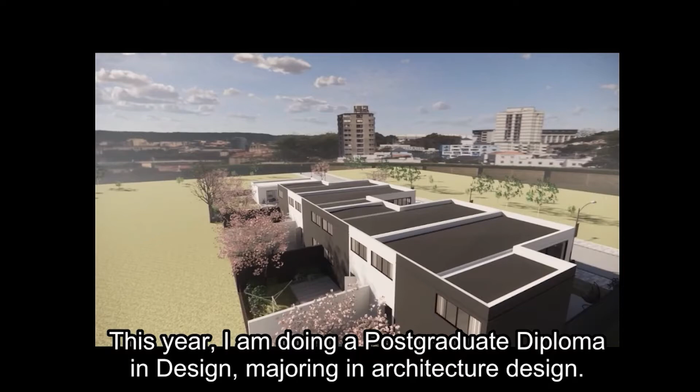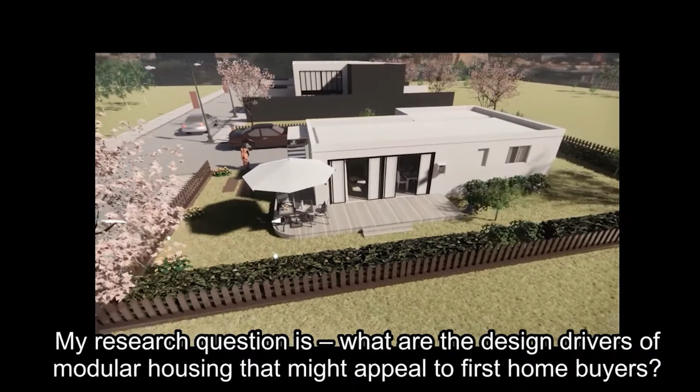This year, I'm doing a postgraduate diploma in design, majoring in architectural design. My research question is, what are the design drivers of modular housing that might appeal to first-home buyers?

The current urbanization and financial speculation have caused an unsustainable global housing crisis. In New Zealand, the most obvious feature of the housing crisis is the soaring housing prices. There are many factors related to the housing crisis, like affordability, demand, and supply.

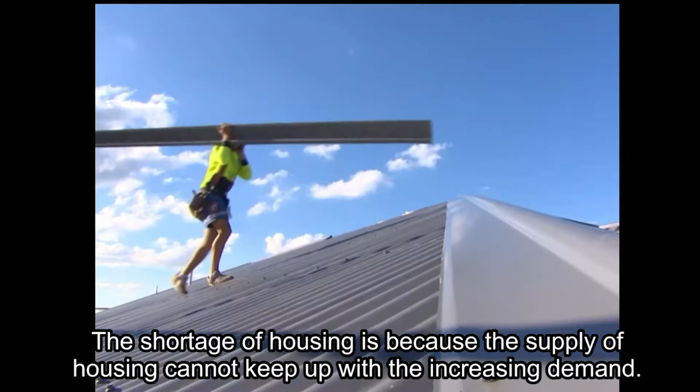However, in the final analysis, a shortage of housing is the fundamental problem. The shortage of housing is because the supply cannot keep up with the increasing demand. As a result, housing prices have repeatedly hit record levels. Thus, it is difficult for first-home buyers to enter the market.

If it is possible to solve the shortage problem, the housing crisis will be solved. Therefore, the possible way to solve the shortage problem is to increase the supply of housing and decrease the demand by investors. The challenge is that traditional construction methods are not able to achieve these goals.

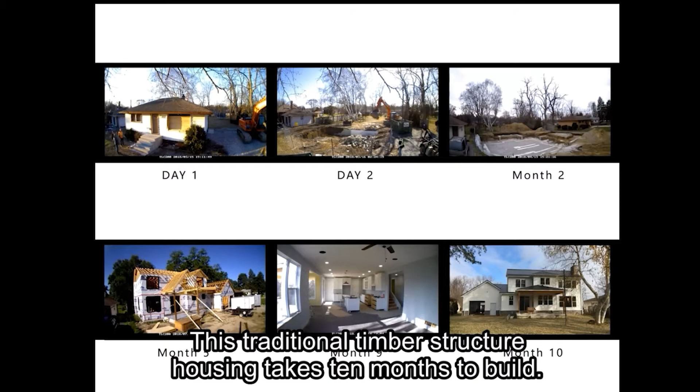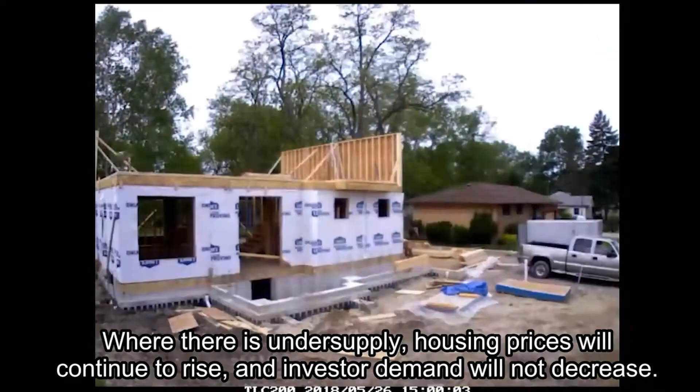Why? This traditional timber structure housing takes 10 months to build. The construction speed is too slow to guarantee the supply. Where there is undersupply, housing prices will continue to rise, and investors' demand will not decrease.

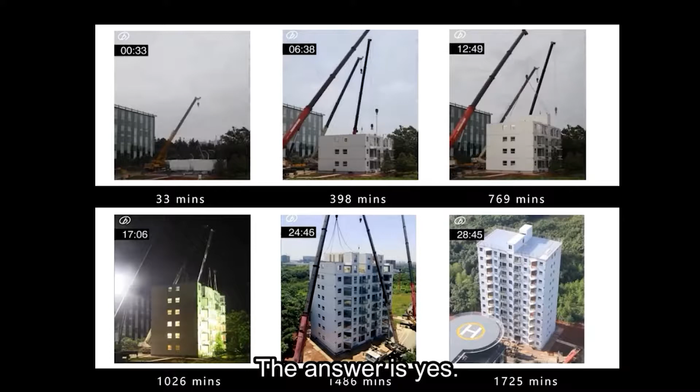Is there any way to solve this problem? The answer is yes. This 10-story modular apartment building in China took only 28 hours to install on site. With this rapid construction speed, the housing shortage can be solved, and the cost is even lower than traditional construction.

Why does modular construction have such a big advantage? Are there any shortcomings of modular construction? To answer these questions, we should understand what modular construction is.

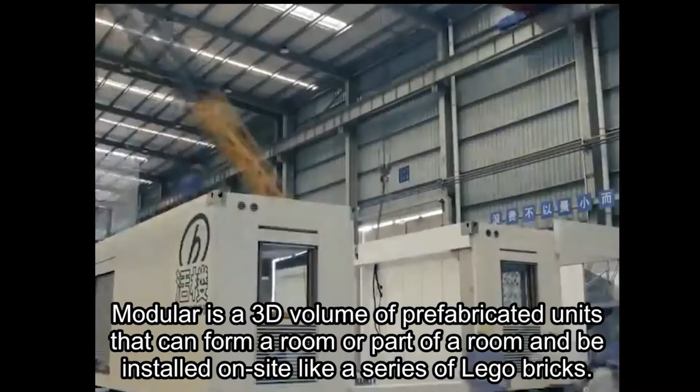Modular is a 3D volume of prefabricated units that can form a room or part of a room and be installed on site like a series of Lego bricks. A modular building can be built rapidly and costs less than traditional building because of mass production.

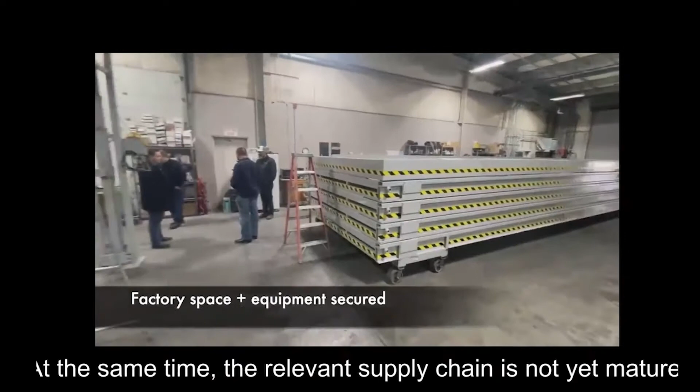As for the shortcomings of modular construction, first of all, the establishment of a large-scale factory for automated production requires many upfront costs. At the same time, the relevant supply chain is not yet mature. Therefore, it is not easy for modular construction methods to replace traditional building methods in the short term.

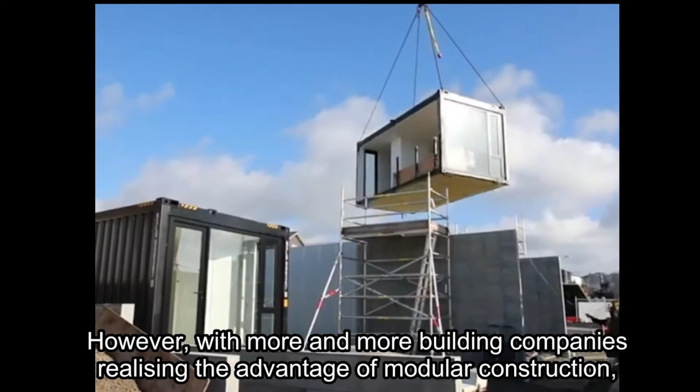However, with more and more building companies realizing the advantages of modular construction, we will finally see the necessary changes in building around us. I believe this is true because sustainability is very important.

We have just talked about the shortage of housing. Have you ever thought about the shortage of Earth's resources? What would happen if human beings exhausted these resources?

Scientists and entrepreneurs have given us two different answers, and it's not science fiction. Which one would be your choice? SpaceX, explore the infinite outer space, or Meta, live another life in a virtual universe?

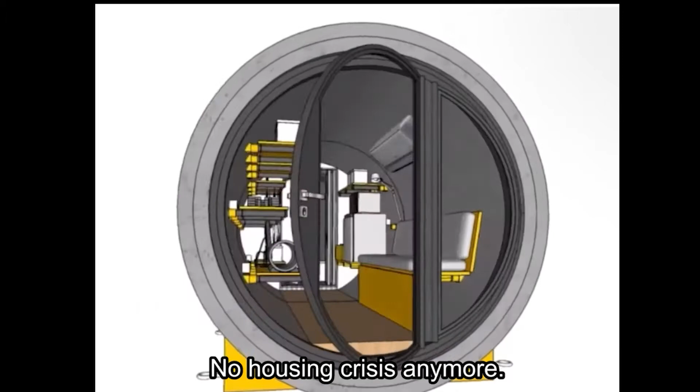If people can learn, work, shop, socialize, and entertain in a virtual universe, do we still need much space in reality? Maybe what we need is this kind of capsule room, no housing crisis anymore.

If we do not want this to happen in the future, we know what we need to focus on now. Yes, sustainability. Modular building is sustainable.

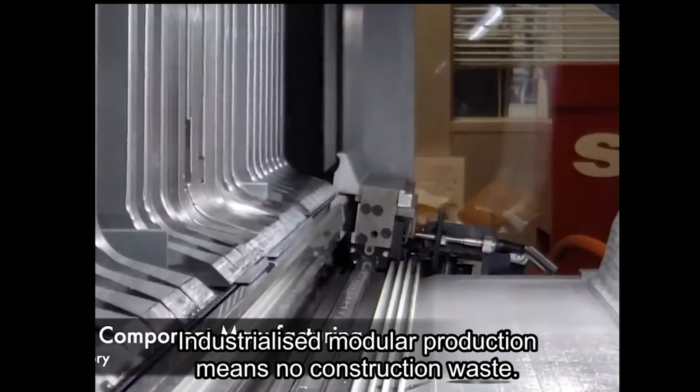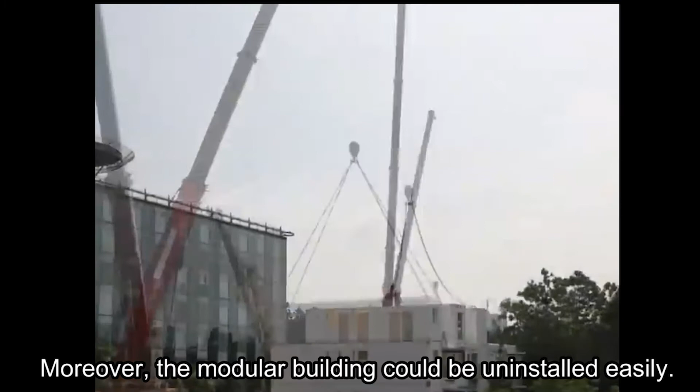Industrialized modular production means no construction waste. Moreover, the modular building could be uninstalled easily. The whole building can be moved to another place, shipped back to the factory for maintenance, and the module can be reused.

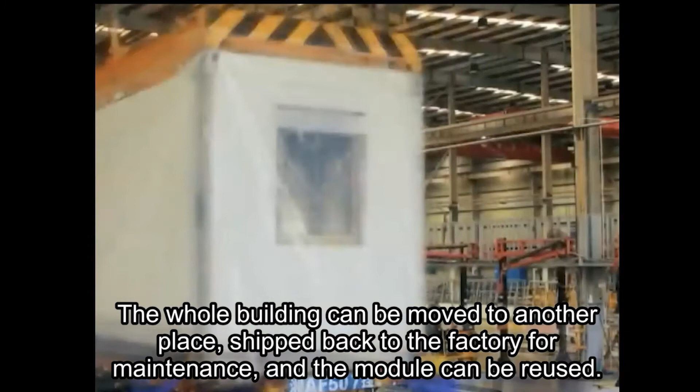Modular housing has so many advantages. Is there any successful case in New Zealand?

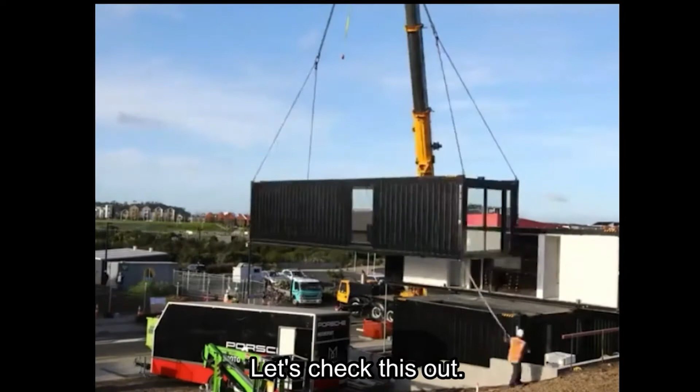Let's check this out. The first case is Modular, a developer in Auckland. The goal of this company is to supply the market with 3-bedroom houses for first home buyers priced at or below $800,000. After a 3-year exploration of the business model, they find that standardized modular housing is the only way to achieve that goal.

This is their product in Hobsonville Point. The second case is Kiwi Modular Homes, a building company in Christchurch.

They used smaller modules with a length of 4.2 meters and a width of 1.2 meters and 2.4 meters. Through the combination of different modules, they can meet different needs, which is more flexible than the module product.

The third case is a modular house on Bassett Road in Auckland. The site of this house was unused for a long time because of the slope, and it was not easy to build with the traditional construction method. There are many difficult sites in New Zealand, and modular buildings can solve the problem of construction on such sites.

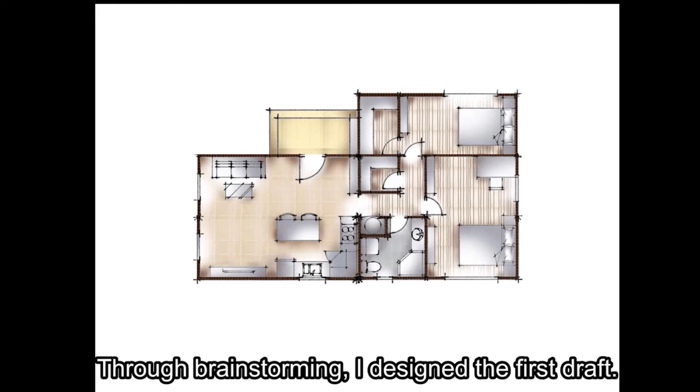I found 3 design drivers of modular buildings through these 3 cases: standardization, flexibility, and suitability for difficult sites. Through brainstorming, I designed the first draft.

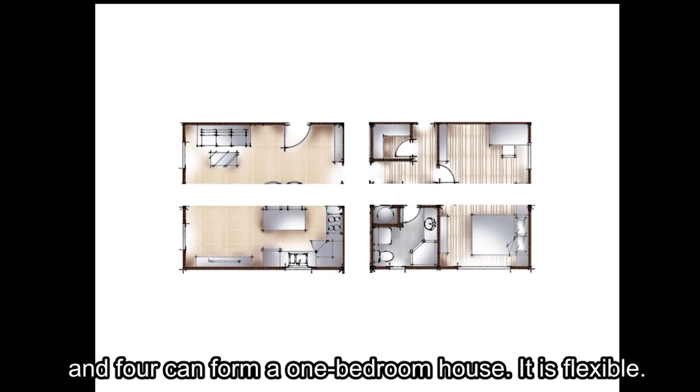This house comprises 5 standardized modules with a standard freight container size, easily transported and installed on site. Moreover, 2 modules can form a small apartment unit, and 4 can form a 1-bedroom house. It is flexible. Then I did a tape floor plan test.

I used tape to draw the floor plan 1-to-1 on the ground. Then I invited students passing by to test whether the layout was reasonable and asked them to fill out a questionnaire. I received 51 feedbacks.

Let's take a look at the participants' demographic first. Most of them are under 30 and hope to buy their first house within 10 years. They hope to have 2 to 3 bedrooms, and the price is between $400,000 and

$600,000. Finally, 65% of participants indicated that they could consider the design of the flexibility of the modular design.

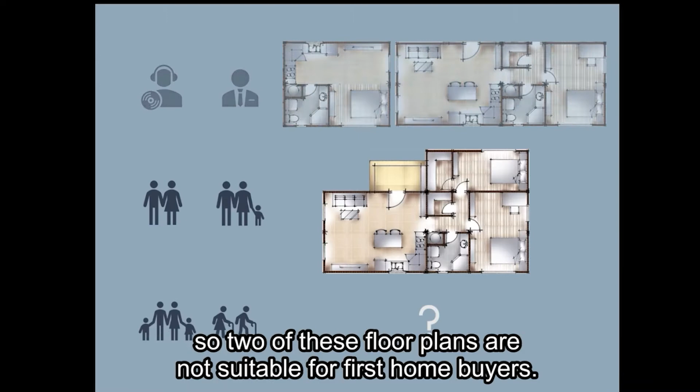It can be seen from the feedback that very few participants would choose a 1-bedroom house as their first home. So 2 of these floor plans are not suitable for first home buyers. I need to improve this 2-bedroom design and add another 3-bedroom design.

By sorting out and analyzing the content of the 51 questionnaires, I improved the layout of the 2-bedroom house. Compared the improved floor plan with the first draft, the entries changed from a longitudinal wall to a transverse wall.

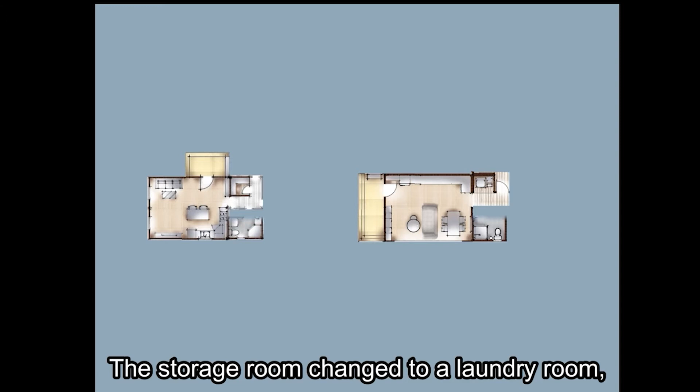A dining table added to the lounge. The kitchen has more bench space. The storage room changed to a laundry room. The bathroom is not as crowded as before. The master bedroom and the secondary bedroom have swapped location. The space arrangement more closely matches the desire of the participants.

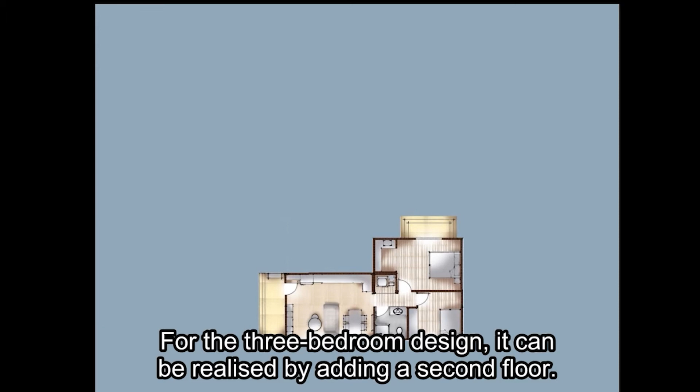For the 3-bedroom design, it can be realized by adding a second floor. The second floor uses the same 3 modules as the first floor and 2 identical overhead modules.

This is the design outcome animation. The first one is the same design as the 2-bedroom house.

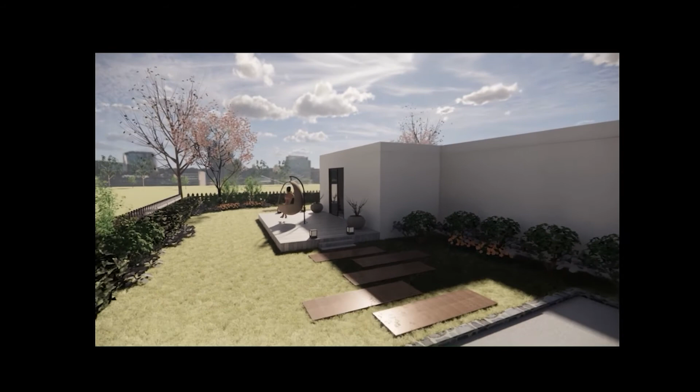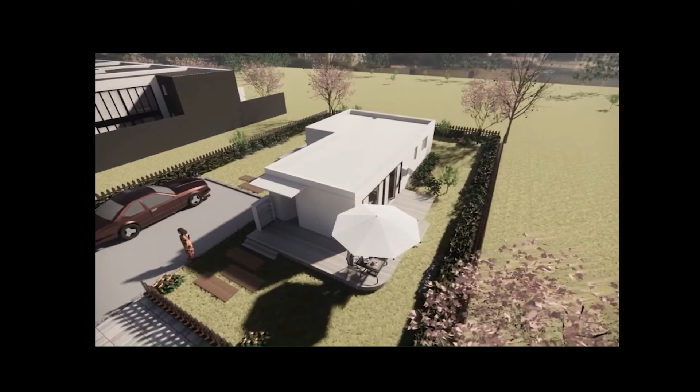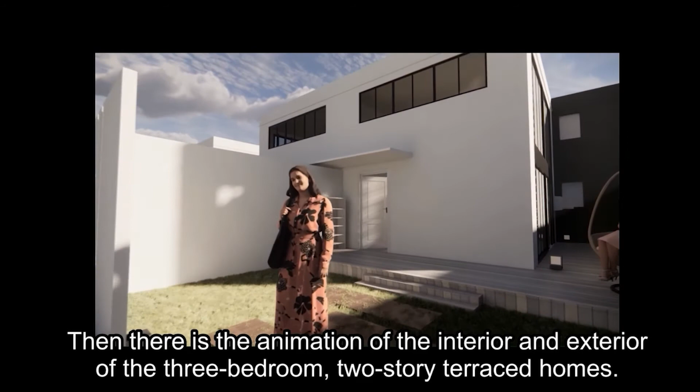Then there is the animation of the interior and exterior of the 3-bedroom, 2-story terraced homes.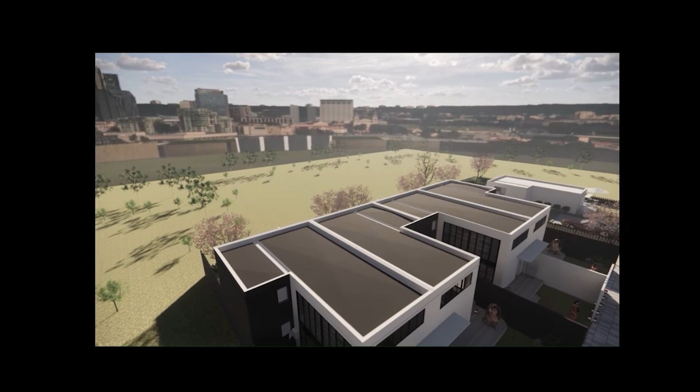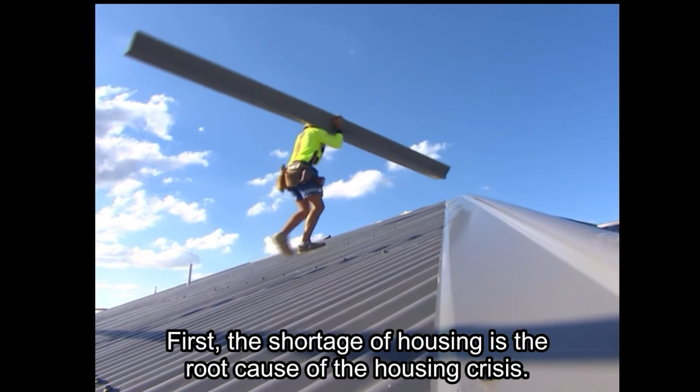To summarize this research, there are a number of crucial factors. First, the shortage of housing is the root cause of the housing crisis. Modular buildings can meet the current housing shortage and play a huge role in social sustainability.

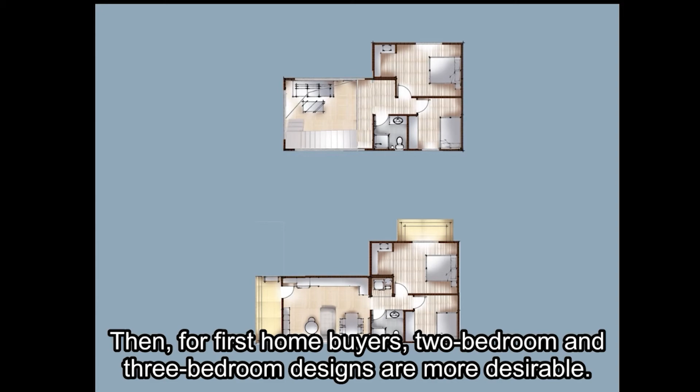Second, the design drivers of modular housing are standardization, flexibility, and suitability for difficult sites. Then, for first home buyers, 2-bedroom and 3-bedroom designs are more desirable. Finally, out of production cost considerations, my design adopts modernist and concise design aesthetics.

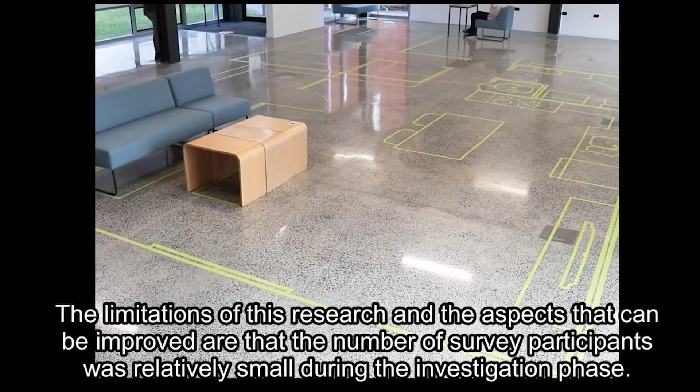The limitation of this research and the aspects that can be improved are that the number of survey participants was relatively small during the investigation phase. The specific answer varied depending on each participant's background. If there are hundreds of participants, the conclusion may be more objective and generalizable.

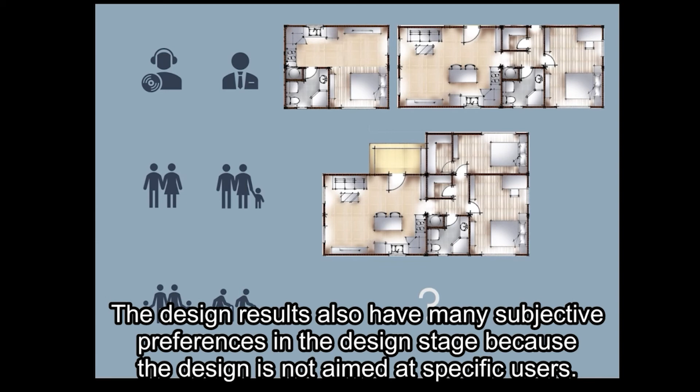The design results also have many subjective preferences in the design stage because the design is not aimed at specific users. At the same time, this design has no specific location. So the planning of the site, such as the planning of the solar paths, was carried out by ideal conditions. In specific projects, modular buildings need to accommodate the limitations of various sites, and the design may not be so

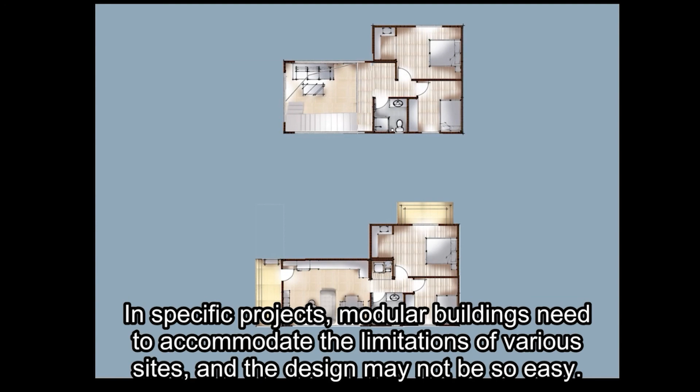Easy. Finally, we still have time to enjoy the beauty of the real world if we use this sustainable approach, modular housing. Thank you.